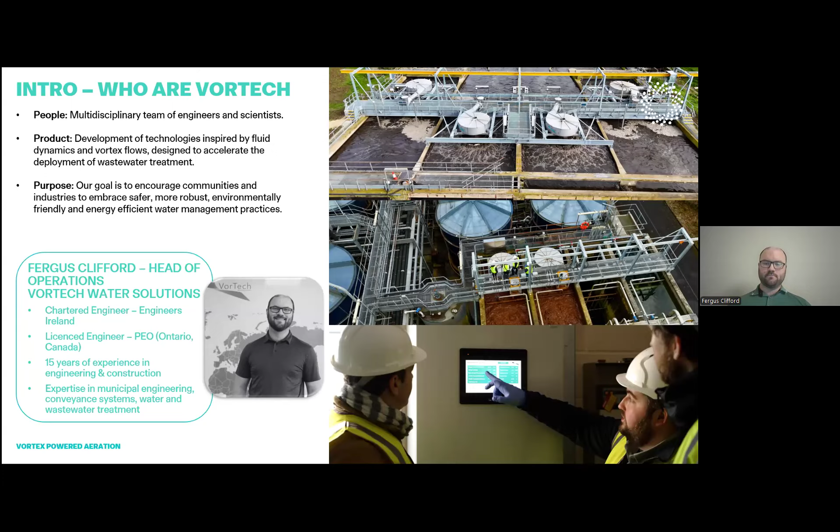So a little bit of background on myself. I'm not going to go into myself because Alan's already given a fairly comprehensive introduction, but just to give a little bit of background on Vortech Water Solutions, who we are and what we do. We're a Galway-based wastewater technology company. We've developed a proprietary wastewater aeration technology, which is inspired by fluid dynamics and the core principles of vortex flows, which we're deploying in treatment plants in Ireland, UK, Australia, and further afield.

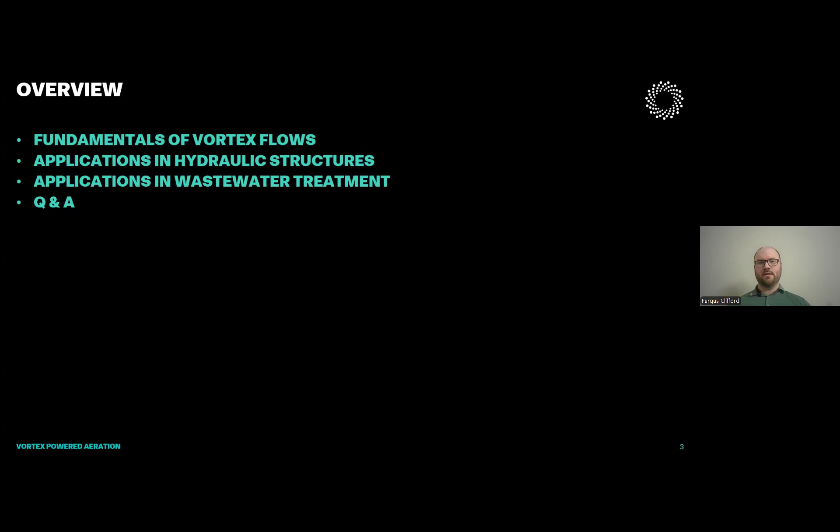Our team is made up of a multidisciplinary team of both engineers and scientists, and our team is cut from the same cloth in the sense that we're all fairly technically astute, but at the same time, we're not afraid to roll up our sleeves. And we've all been on site. I've been on site inspecting pumps at some of our wastewater installations. A few of my colleagues have not just inspected pumps, but actually maintained them, lifted them out. So we're not afraid to get hands-on. And I think that's one of the reasons why we have unique insights in the area of hydraulics and fluid dynamics.

As a purpose for the company, it's pretty clear. What we're trying to do is encourage communities, industries, and various stakeholders to embrace safer, better, environmentally friendlier, more energy efficient water management practices.

So really, there are three things that I want to try and convey from today's presentation. The first thing is to cover the fundamentals of vortex flows. So what is a vortex flow and how is it described in scientific or engineering terms? And then look at practical applications for this natural phenomenon in hydraulic structures and in the field of wastewater treatment.

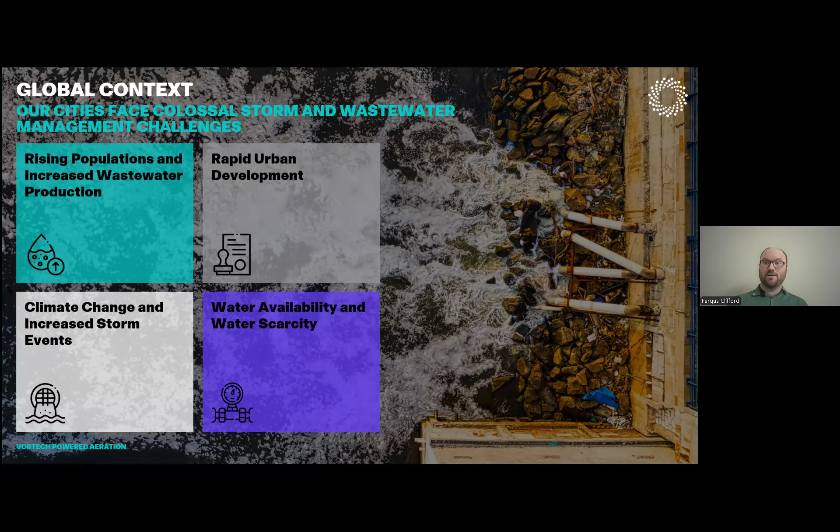So just to set the scene, the global context, particularly when it comes to urban infrastructure and conveyance systems, our cities are facing significant challenges today. So an obvious one is rising populations, but also water consumption per capita and generation of wastewater per capita is increasing in many different areas as well, putting strain on existing infrastructure.

Rapid urban development is putting strains on our infrastructure. So I had a couple of colleagues in Abu Dhabi last week at a conference, and an interesting fact I heard was the municipal area in Abu Dhabi has grown in size by 1,700% over the last 40 years. Incredible expansion, rapid expansion. But with that comes severe strains and challenges on the water infrastructure in that region.

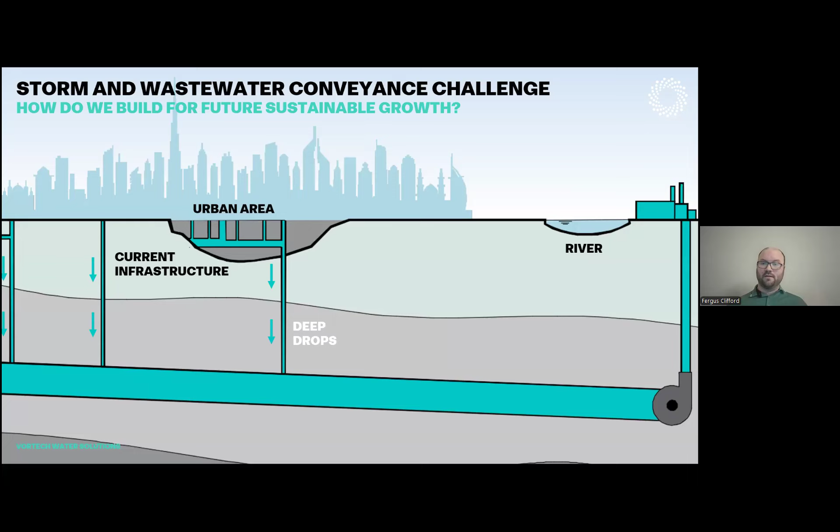Climate change is an obvious one. This 100-year storm 20 years ago is more frequent today. But coupled with that, and ironically enough, even in Ireland, water availability and scarcity is becoming a significant challenge globally. And while we're probably less prone to that in Ireland, even the Shannon pipeline to Dublin to shore up our capital's future water resources is an example of how even water availability actually does impact a country like ours.

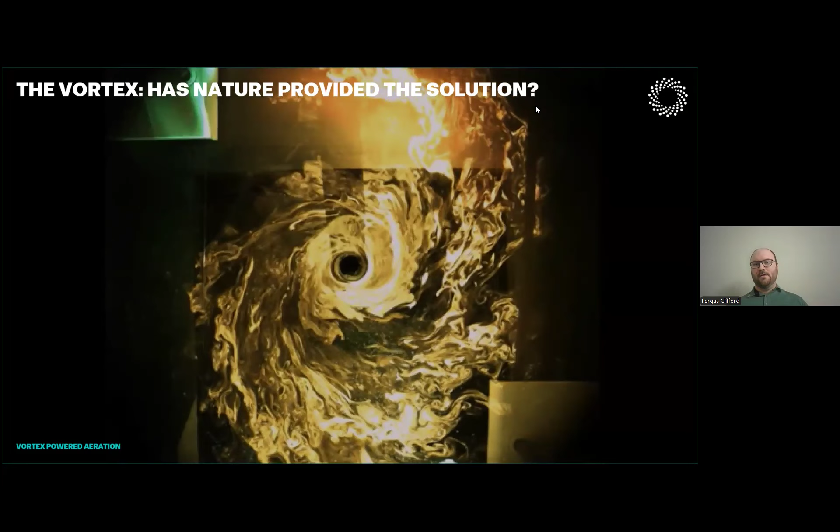So let's consider a typical urban area. So we've got our city and we've got our existing infrastructure. And when we consider the challenges on the previous slide, many cities around the world, the existing collection infrastructure, which is just a system of storm and sanitary sewage systems, or combined systems, is coming under stress. And if we want to avoid adverse impacts to the environment, like discharges to natural water bodies or even flooding impacts to our economy, we need some sort of a way to intercept the flows which are exceeding the hydraulic capacity of our infrastructure in these cities.

And the main way that that's been done to date is by going down. So we sink drop shafts into the ground and we construct deep tunnel conveyance systems, which are designed to intercept these flows, to store them, and also to eventually convey them to some kind of wastewater treatment infrastructure where it can be treated, potentially even reused, and discharged back to the natural environment. So in today's webinar, we're going to focus on two particular areas of this overall infrastructure thread. And that's the deep tunnel segments, so the drop shafts and the deep tunnel conveyance system, and also the wastewater treatment infrastructure.

So what we're looking at here is a typical vortex flow formation. And at first glance, it might seem quite chaotic. But in reality, it's actually a very predictable and controlled process. So if we dropped a little particle into this vortex flow, we could actually predict over time what velocity it would travel at, what its trajectory would be, what the pressure drop would be from A to Z. So with that in mind, what it means is there's a natural phenomenon which is predictable and potentially could be leveraged to actually solve some of the challenges that we've discussed on the previous slide. And one of the ways of doing this is the use of vortex drop structures, which I'll come on to in a minute.

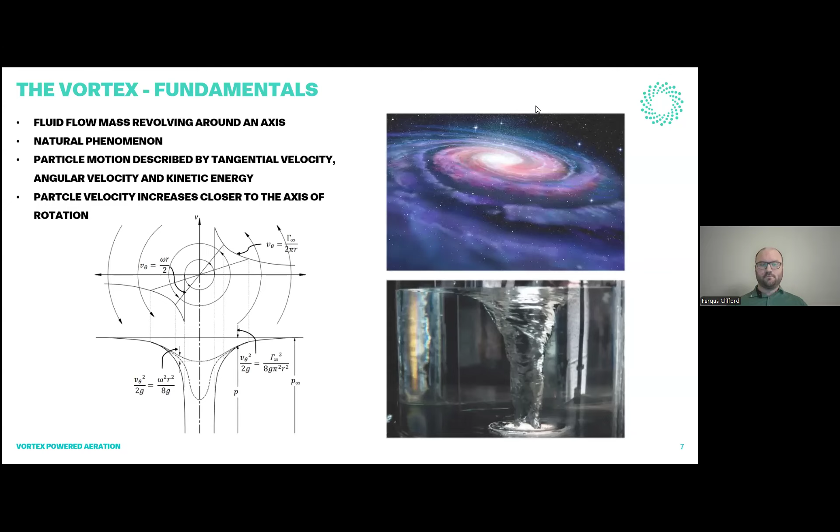But just to cover the fundamentals of vortex flows. So I mean, what is a vortex flow? In layperson's terms, it's simply just a fluid flow mass revolving around an axis. So we've all seen it in some shape or form, whether it's a hurricane or a cyclone. We've seen it in pictures of galaxies, space. Even when you stir a cup of tea, you generate a vortex. So we've all seen it in some shape or form or capacity. It's a naturally occurring phenomenon.

And really, from a scientific perspective and an engineering perspective, the three main characteristics of particle motion in a vortex flow are described by its tangential velocity, its angular velocity, and its kinetic energy. So if you look at the schematic below, if there's a few hydraulic engineers on the session this evening, you'll probably recognize some of the formulas. There's velocity head down on the bottom left and the bottom right. There's also a formula there for literally angular velocity. But the formula there on the top right is an interesting one. It describes the tangential velocity of a particle in a vortex flow. And that constant on top of the equation, gamma, is fixed.

So immediately we can see that there's a relationship between the velocity of a particle in a vortex flow and the radius from the central axis of the vortex flow. So when the radius gets smaller, the particle speeds up. And that's a key characteristic of vortex flows, which can be leveraged in big engineering projects globally and even in the wastewater sector as well.

So coming back to our city, we've got our existing infrastructure, we've got our infrastructure that's under pressure. We need to send the excess hydraulic load somewhere. So I guess the first part of the webinar is going to focus on the deep tunnel conveyance system. And in the second part of the talk, we'll do a deeper focus on the wastewater treatment side.

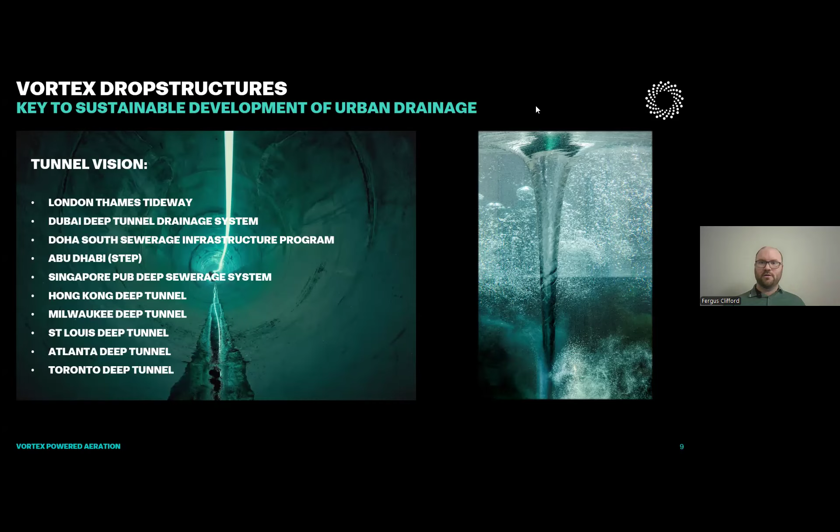The Hong Kong deep tunnel is another interesting one. I heard a statistic recently where I think it's upwards of 210 cubic meters per second in peak flows flowing through that system. Incredible flows. And the Toronto deep tunnel was actually a project that I worked with in Toronto when I worked in Canada for about 8 years. On the east side of Toronto, the Don River runs along the city.

And again, it's the same challenge that a lot of older cities, let's say, I mean, Toronto isn't an older city, but a lot of the sewage infrastructure there is quite old. Hydraulic capacity insufficient, and during wet weather events, particularly some of the combined sewer segments will literally overflow into the Don River, which makes its way into Lake Ontario. So there's significant environmental and pollution concerns associated with that. And that's why these projects are necessary.

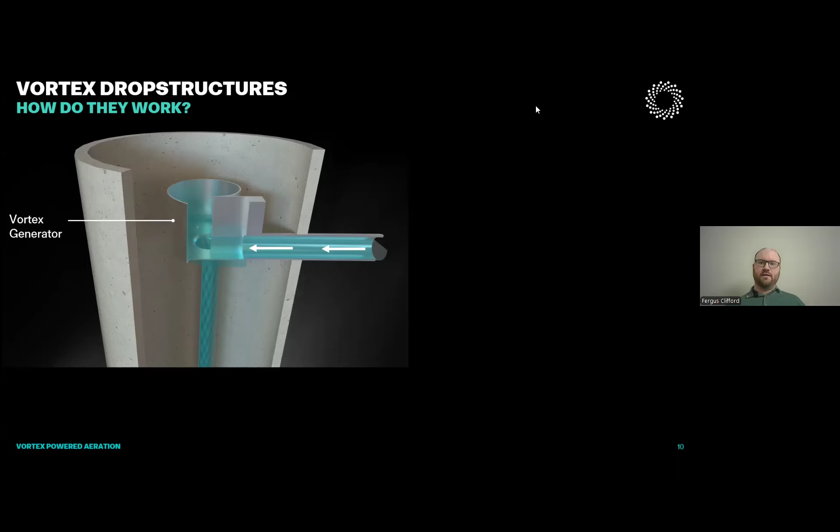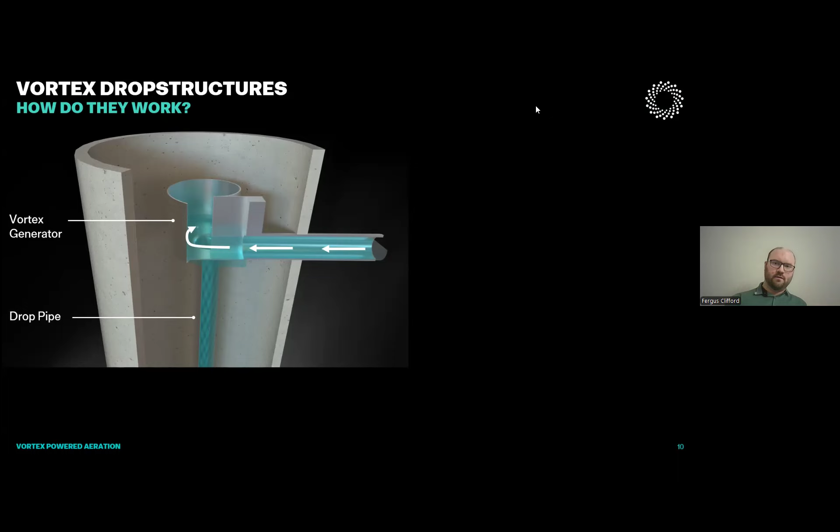One thing to bear in mind though, when you're dropping flows to such depths, so we're starting off at a high elevation and we're dropping flows 20, 30, 40, even 50 meters, the mass of that fluid column is substantial and the forces that it can generate are massive. So an interesting stat I came across recently was your typical vortex drop structure can dissipate up to the equivalent of 6 tons of TNT per hour in force, so incredible forces generated. And we need a way to drop those flows safely so that they're not damaging our infrastructure or causing erosion, let's say. So how do drop structures work?

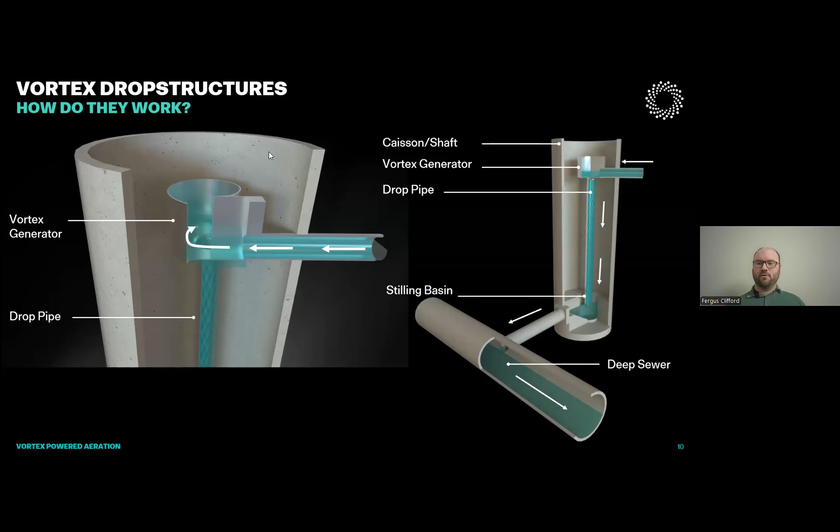Again, most of you will be familiar with this, but we've got a linear flow coming in from a conveyance system, which is a sewer. So if we track our little particle coming in, it's got a linear velocity, linear momentum. And this vortex generator, which is just a specific geometry designed to induce a vortex when an incoming flow meets it at a particular trajectory, converts the linear momentum into angular momentum. So now our particle, it's got linear velocity. Now it's flowing around the vortex generator with an angular velocity.

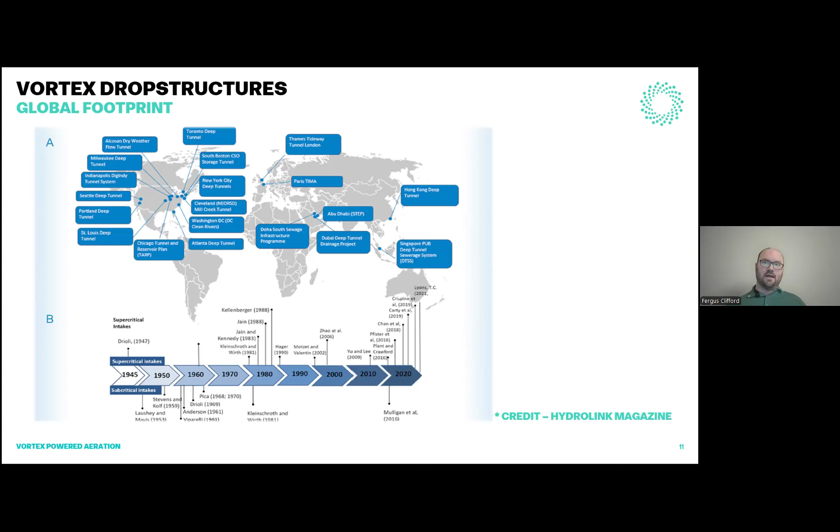But as it's moving in towards the middle, towards the vortex core, it's speeding up. So we talked about that in the previous slide. When the radius is decreasing, our velocity is increasing. And when it enters the drop pipe, because of its velocity, it's got a significant centripetal force, so it grips the walls. And over drops of 20 or 30 meters, you can dissipate a substantial amount of energy because of the centripetal effects and the friction effects. So that's how we're able to do this. And on the right-hand side, you can see kind of an overall schematic of your typical vortex drop shaft and how that connects to your deep sewer segment.

So just an interesting kind of map of deep sewer projects that have been rolled out across the globe. You can see a lot of cities in North America are now pursuing deep tunnel projects because of flooding issues that they're having and insufficient capacity with their existing infrastructure. Thames Tideway is a massive project. The Toronto Deep Tunnel I worked on briefly, but you can see that like large urban areas are now having to start constructing these vortex drop shafts and deep tunnel segments to deal with capacity issues.

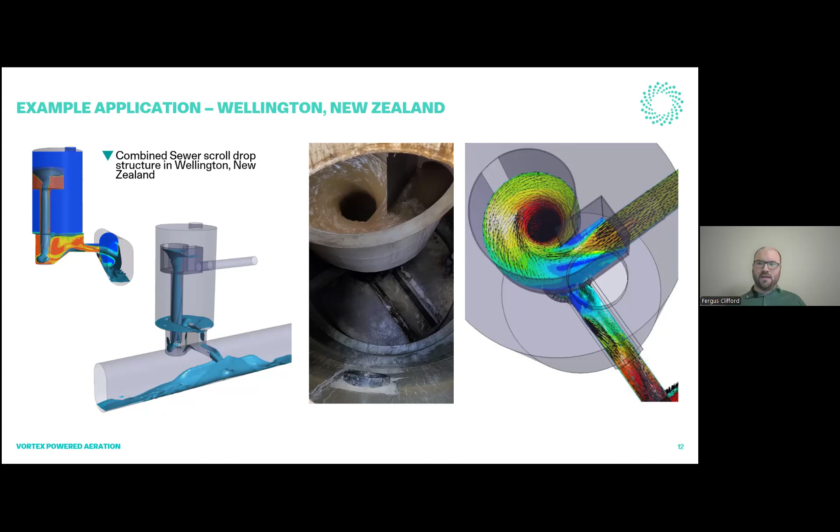So just as an example, and this example is intended to show the CFD angle. How can we leverage the numerical world, or the simulation world, to predict how flows are going to behave through different types of drop infrastructure, hydraulic infrastructure? This particular project is a vortex drop shaft that Vortech simulated for a client in Wellington in New Zealand.

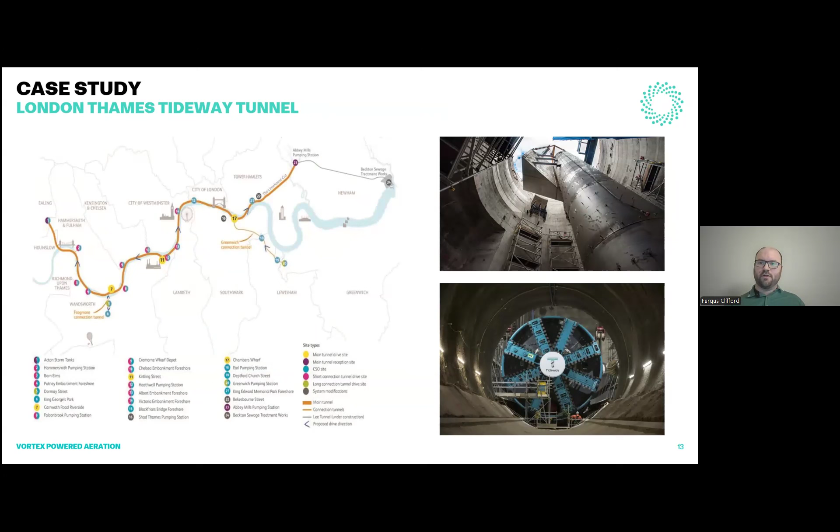And you can see in the simulation domain on the left-hand side, compared to the actual result on the right-hand side, that it can provide you, prior to construction, with a very good insight on how the fluid is going to behave under different flow conditions. So you might want to examine how it's going to behave under peak wet weather flow, or under dry weather flow conditions, to get the full variation.

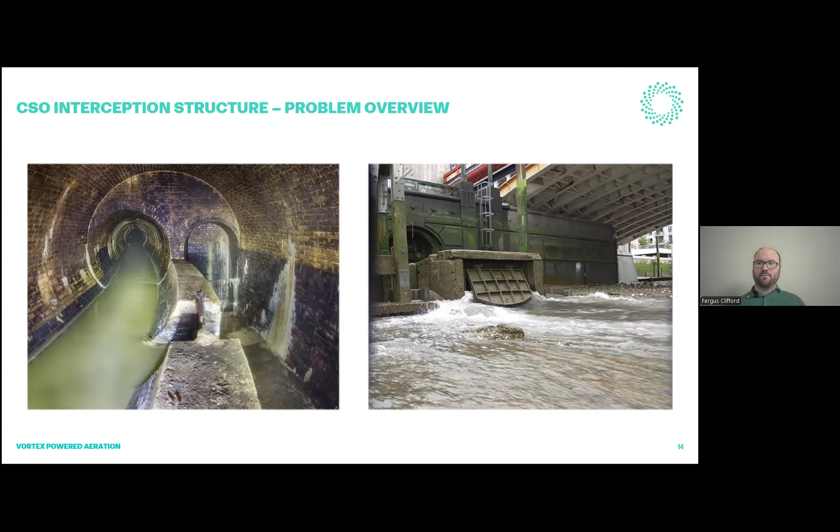So this is where CFD can be leveraged as a tool to understand the behavior of these structures prior to construction, and also identify particular risks. So maybe our vortex insert doesn't have enough depth and it overflows during certain peak flow conditions. So it allows us to spot risk in advance and make design tweaks prior to construction.

Another case study I want to run through quickly is the London Thames project, which I alluded to earlier. You can see that this is a fairly extensive deep tunnel project, which was constructed in London over the last decade or so. There are various different parts to this project. The element that we were involved in was a section around the Putney Bridge, again, prior to my time.

But to provide a little bit of context on the challenge here, on the left-hand side, you can see the existing type of sewage infrastructure in London. London's sewer system has been constructed from the 1800s onwards. So it's an incredible piece of engineering, but it was also built for the demands of that time. And the demands of our time are substantially more. And you can see the results of insufficient capacity in these systems on the right-hand side.

So with a combined sewer system in a wet weather event, storm flows combine with sewage, overflow events occur, and inevitably the combined sewage just makes its way into the River Thames. So there's an environmental impact and there's a water quality impact. So that's the purpose of the Thames Tideway project.

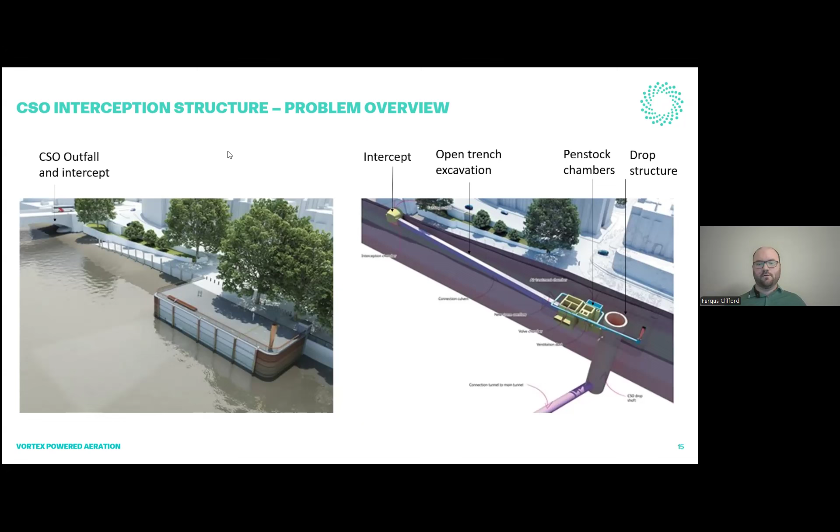The particular segment that Ward and Burke were involved in, and that we collaborated with Ward and Burke on, was around the Putney Bridge. It's a heritage monument in England. It's an important piece of architecture in London. And directly underneath the bridge, there was a combined sewer outfall, which essentially just served as a discharge point for sewer overflow from the existing sewer system.

So Thames Water wanted to capture the combined sewer overflow from this CSO and convey it to the new deep tunnel system, where it could be stored and treated in the future rather than being discharged into the Thames. And the original concept was to construct an interception enclosure around the CSO, and then open cut excavate a gravity line to a flow control configuration with penstocks and valves, and then drop it down in a drop structure to the deep tunnel system.

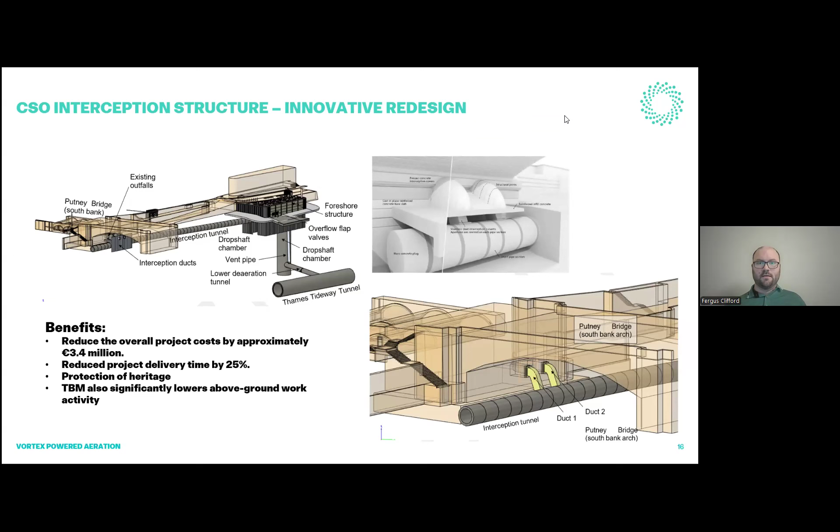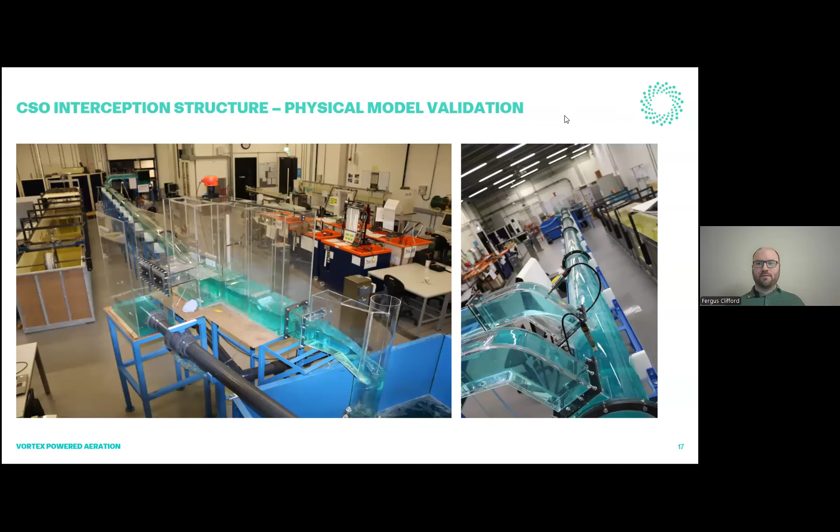But this concept presented significant challenges, particularly with the open cut element in such close proximity to the abutments of the bridge. It presented structural concerns and structural risks. So Ward and Burke came up with a very innovative concept, and I've worked with them in Canada as well on the trenchless front. Very good contractor, very good when it comes to microtunneling as well. But they came up with a very innovative trenchless approach for intercepting this CSO.

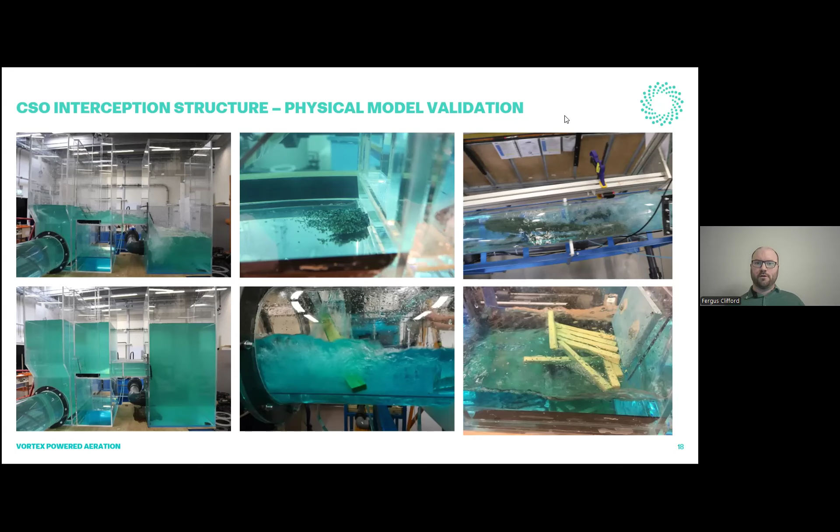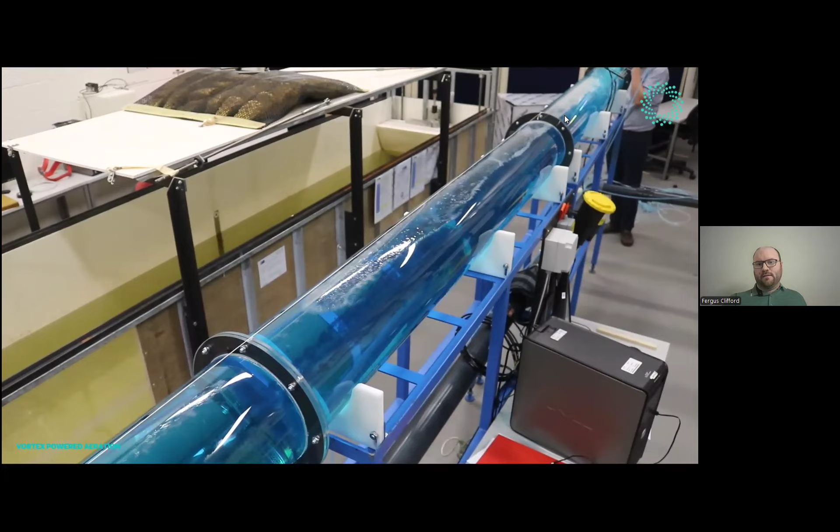However, this approach required validation with Thames Water. There was an existing design which had been validated, and Thames Water wanted assurances that this new concept would work. But what this concept would deliver is a substantial reduction in the overall cost, and a significant reduction in time on site, which means less disruption in the city, protection of a heritage monument, and, because the vast majority of what was being proposed was trenchless, it eliminated significant above ground disruption to do with open cut excavation. So really you would have only had localized excavation where the reception and launch shafts would have been.

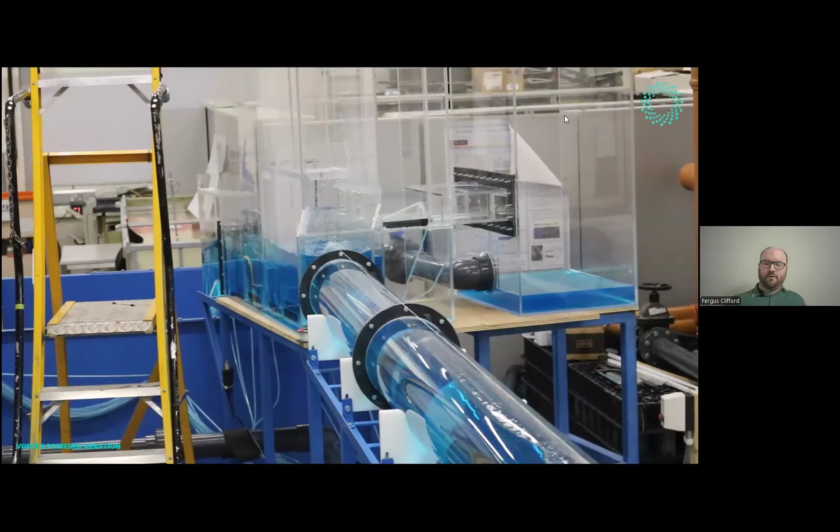So the role that Vortex played in this project was to help Ward and Burke with the numerical and physical validation of this new concept. And how we did that was we actually constructed a scale model of this sewer segment in NUIG in Galway. And that scale model is actually still in the hydraulics laboratory today.

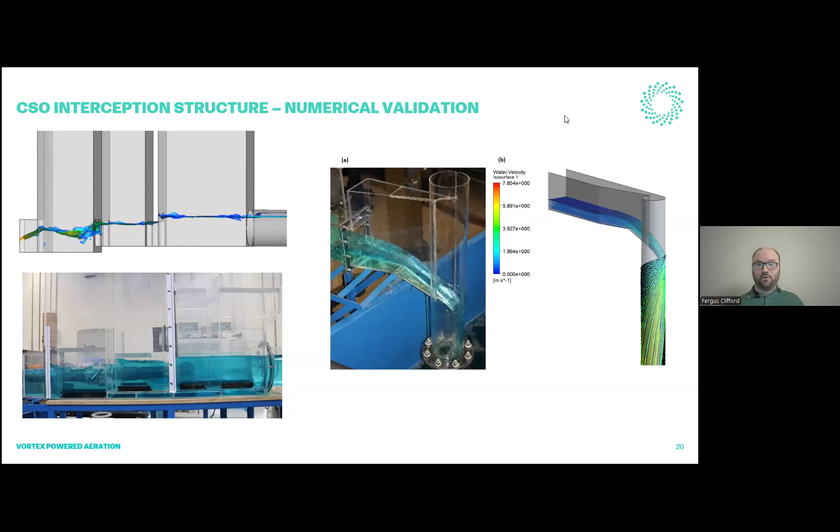And what we were able to do was simulate physically. We were actually able to physically test different flow configurations through the scale model. For example, we were able to look at the tidal influences on the Thames on conveyance. We were able to look at the impact of grit, gravel, debris getting into the system and how that might be evacuated. So there's lots of different things that we were able to demonstrate to Thames Water by constructing this physical model.

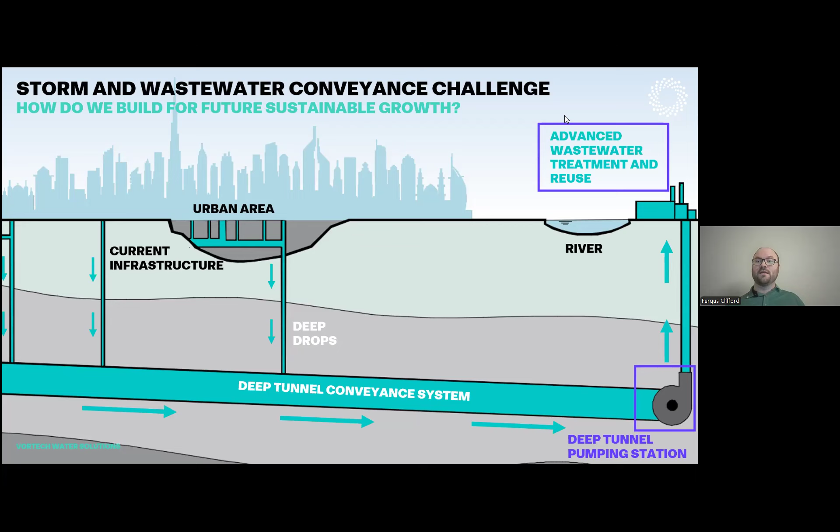So coming back to our city again, we've talked about how we can potentially deal with challenges for the existing collection infrastructure in our urban area. And now that we've captured those flows, they inevitably make their way to some kind of a pumping station from where they're conveyed to a wastewater treatment facility. And this presents another challenge. So again, going back to the context, specifically when we look at wastewater treatment, population increases, more water consumption. That means more volumes of wastewater are being generated in our urban areas, and that's a rule of thumb, broadly speaking, globally, including in Ireland.

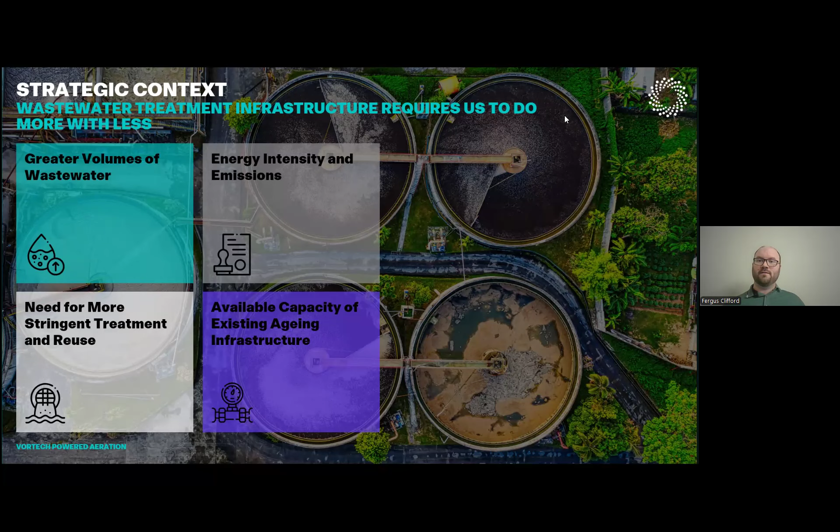One key element that's now come on the radar in recent times is the energy intensity of wastewater infrastructure. I read a statistic recently. I think approximately 3 to 4% of global energy consumption is associated with wastewater treatment. So it's very significant. In addition to that, you've got carbon emissions associated with the energy use, but you also have things like nitrous oxide emissions from wastewater treatment plants and methane emissions from wastewater treatment plants, which also have a significant carbon footprint. There's also more pressure being put on existing infrastructure from the regulatory side.

So we've got more stringent wastewater treatment requirements, and in many countries around the world, Australia is a good example of this, treatment plants now need to be able to actually treat wastewater to a point where it can be reused. Some cases even for drinking water, but in many cases at minimum for things like irrigation. All of this in the context of aging infrastructure. And again, just focusing on Ireland, much of our wastewater infrastructure is decades old, treatment infrastructure. With Uisce Éireann, in fairness, there's a lot of new water and wastewater treatment plants being constructed around the country where demands are required. But a lot of our treatment plants are very old. And because we have aging assets and aging infrastructure, it's kind of putting a demand on our existing treatment plants to do more with a lot less.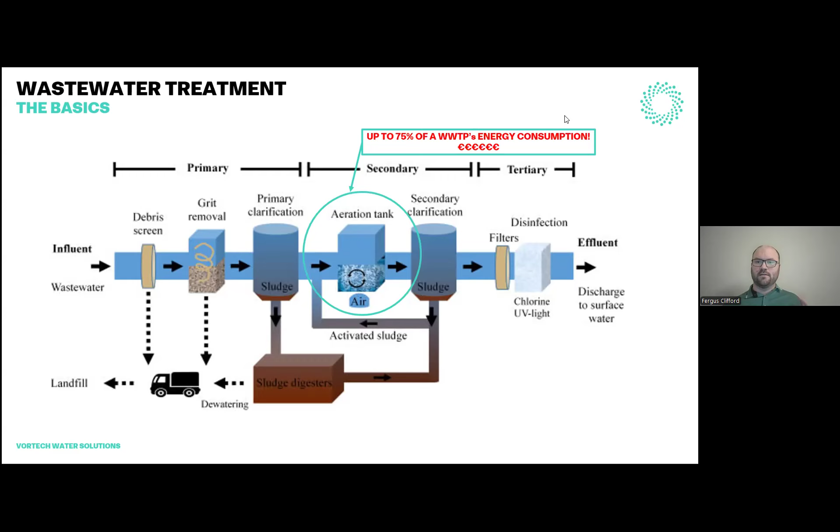So a little bit of a basics on your typical wastewater configuration. In the vast majority of wastewater treatment plants around the world, you'll have primary treatment and secondary treatment. And in some cases, you'll have tertiary treatment as well. And primary treatment, in a nutshell, I like to describe it as kind of crude treatment. So that's your removal of debris, removal of grit, and removal of settleable solids. Your secondary treatment is really the workhorse of a wastewater treatment plant. That's where all of your soluble contaminants make their way.

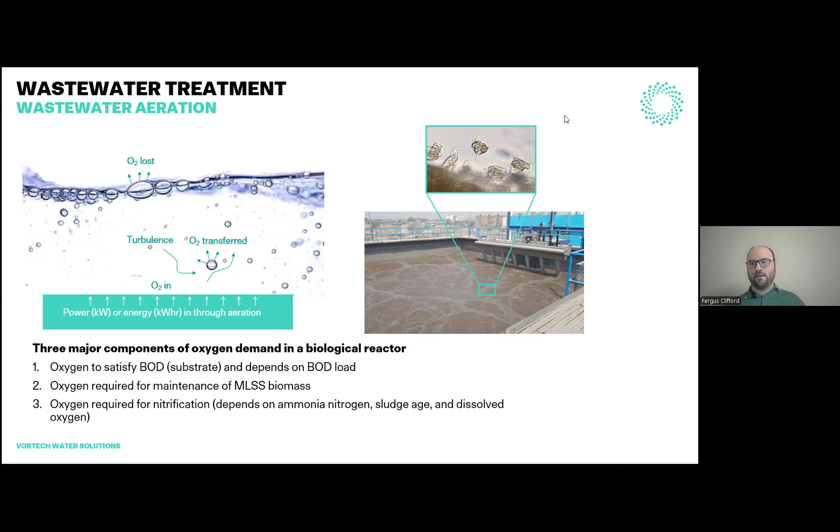And this is where the vast majority of energy consumption occurs, and it's specifically in the aeration tank. So aeration can consume upwards of three quarters of a wastewater treatment plant's energy bill. That can vary, but it's a substantial energy footprint relative to the overall treatment plant. And what that means is if you're going to try and make a significant impact on the energy consumption and carbon footprint of wastewater treatment infrastructure, this is the area that you're going to focus on first.

So just to do a little bit of background on wastewater aeration, what is it and why is it necessary? Well, wastewater aeration in simple terms is simply the introduction of dissolved air and dissolved oxygen into wastewater fluid. And that's done by many different mechanisms, and we'll talk about that in subsequent slides.

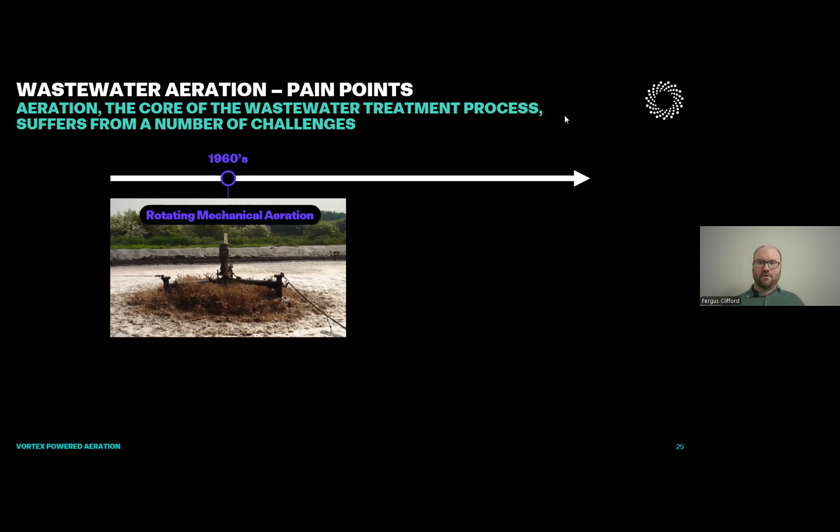But really, the reason it's necessary is because you can see here, the secondary aeration process is referred to normally as the activated sludge treatment process, which basically involves the mixing of wastewater with suspended bugs, I'll call them, suspended bacteria. And these bacteria require oxygen in order to remove the oxidizable contaminants, soluble contaminants within the wastewater. They need oxygen simply just to sustain themselves, just to survive. And they also need oxygen to remove nutrient contaminants from the wastewater, primarily in the form of nitrogen-based nutrients like ammonia, for example. So that's why aeration is necessary, and it's really the workhorse and the most crucial part of wastewater treatment beyond the physical treatment.

Little bit of a background on wastewater aeration technology. So the activated sludge process was invented probably over 100 years ago, towards the end of the 1800s or the beginning of the 1900s. And from then up until maybe the 60s, maybe beyond the 60s, the go-to way of aerating wastewater was simply by surface agitation. So rotating mechanical aeration devices. And what they do is they agitate the surface. That induces a kind of an air-water mixture, and you get aeration from that.

So beyond the 1960s, a lot of work started to be invested in looking into alternative, more efficient methods of aerating wastewater. And what's commonly referred to as the best-in-class technology today is FBDA, or fine bubble diffused aeration. And it's the most efficient way of aerating wastewater. However, both of these technologies pose significant challenges. And really, since the invention of wastewater aeration technology, many of these challenges have not yet been solved. And in particular, with FBDA, that's been the predominant form of aeration over the last number of decades. But a lot of the simple issues just haven't been addressed yet.

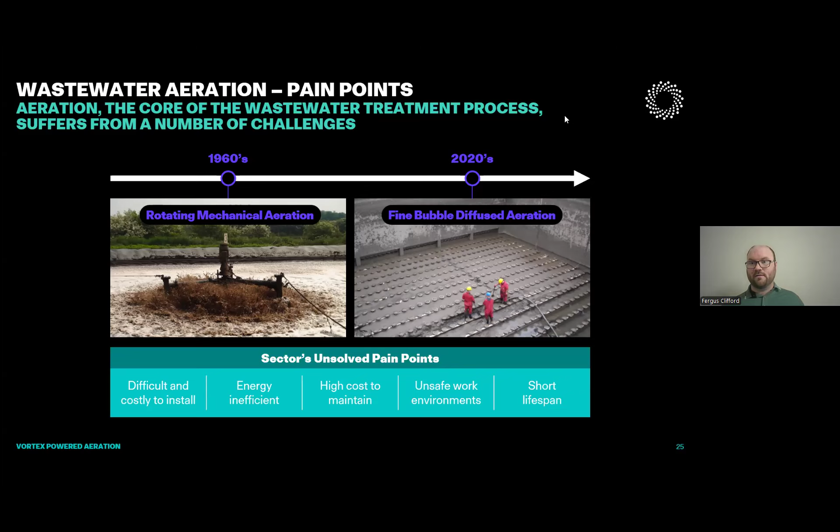So, for example, these technologies can be quite difficult and very costly to install. In many cases, they're energy inefficient. So, as an example, with fine bubble diffused aeration, you can get deterioration in performance over time because the nature of the wastewater constituents can actually coat the little diffusers that inject oxygen bubbles into the reactor. Maintenance costs is something that's been overlooked to a very high degree up until recent times. For example, with typical mechanical aeration, it's got a lot of moving parts, a lot of wear and tear. For example, motors, gearboxes, rotors, bearings, all of which need to be replaced because these things are oftentimes operating 24/7.

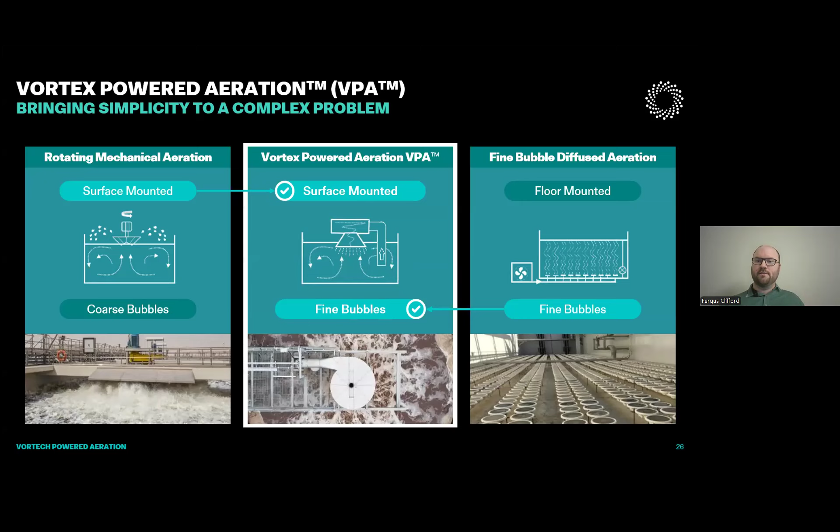Fine bubble diffused aeration, it's installed at the bottom of a tank. So if you want to maintain it, you need to drain the tank, which is very costly. And if your plant doesn't have redundancy, it leaves you with minimal options for how to actually do that. In some cases, we've heard instances of scuba divers being sent in to repair FBDA grids. So sometimes it can be disastrous. That leads into unsafe work environments. And in many cases, the longevity of these technologies is very short. So, we've seen instances of wastewater treatment plants where the FBDA grids don't last longer than 5 years and need to be replaced.

So really, what we're trying to do is understand how can we take the benefits of both of these existing legacy aeration technologies and blend the best parts of both while also eliminating the challenges associated with both. So we talked about how mechanical aeration, one of the benefits is it's surface mounted, so it's easy to access from a maintenance standpoint. It's relatively efficient, but in many cases not as efficient as other options. But what it does poorly is generate fine bubbles, which is necessary for oxygen transfer. Then we've got fine bubble diffused aeration, which is very good and efficient at generating fine bubbles, but which is installed at the bottom of a reactor. And that makes maintenance extremely challenging.

External blowers pumping air into tanks, and sometimes diffuser heads can pop off. So what we've done at Vortech is taken the best of both worlds. We brought aeration back to the top of the tank, but we're utilizing the fundamentals of vortex flows, which I talked about earlier, to generate fine bubbles and inject those back into a wastewater reactor efficiently.

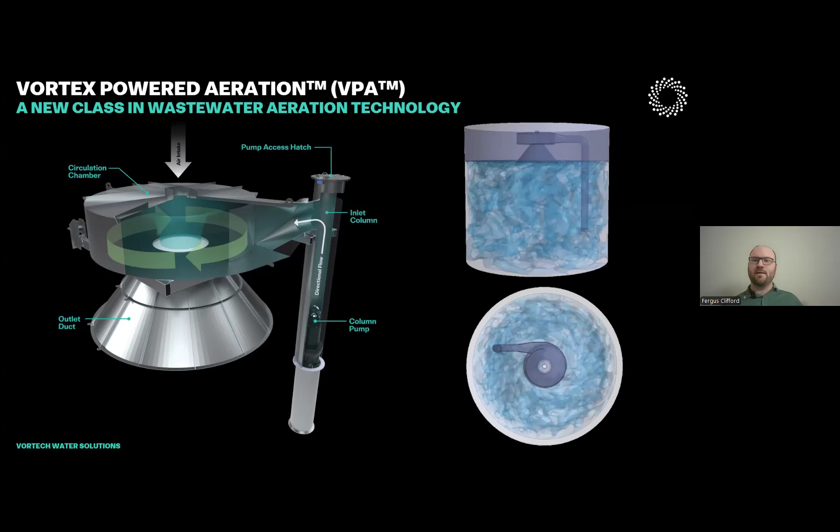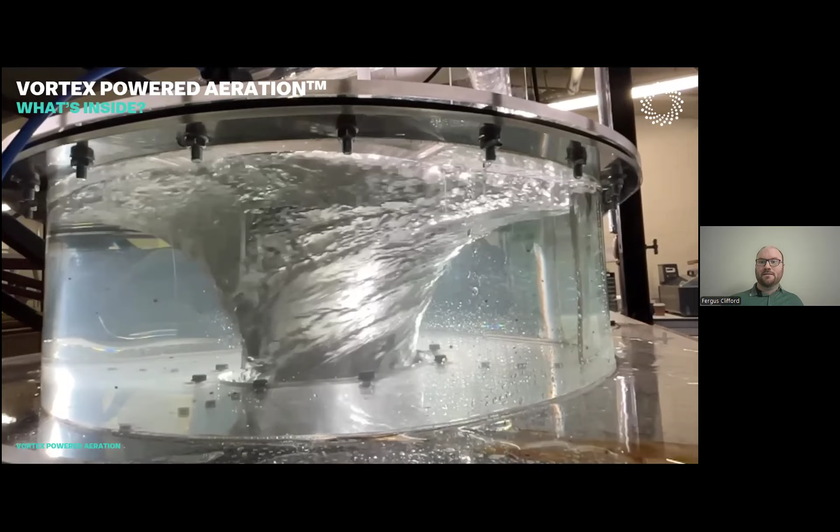So just to show you a little bit about our technology and how it works, there's really 3 to 4 parts to the technology, and there's only one moving part, which is a column pump or an axial flow pump. And how it works is there's an inlet column which is submerged within the reactor, and the pump draws activated sludge from the reactor, circulates it through the vortex device. An orifice on top of the device is open to the atmosphere. So if you can imagine, we're stirring the cup of tea, and in the middle there's a zone where air is constantly getting drawn in.

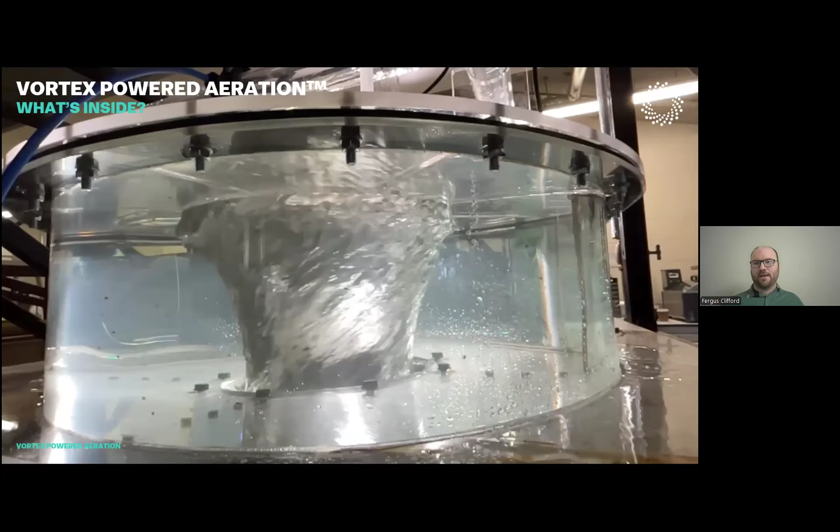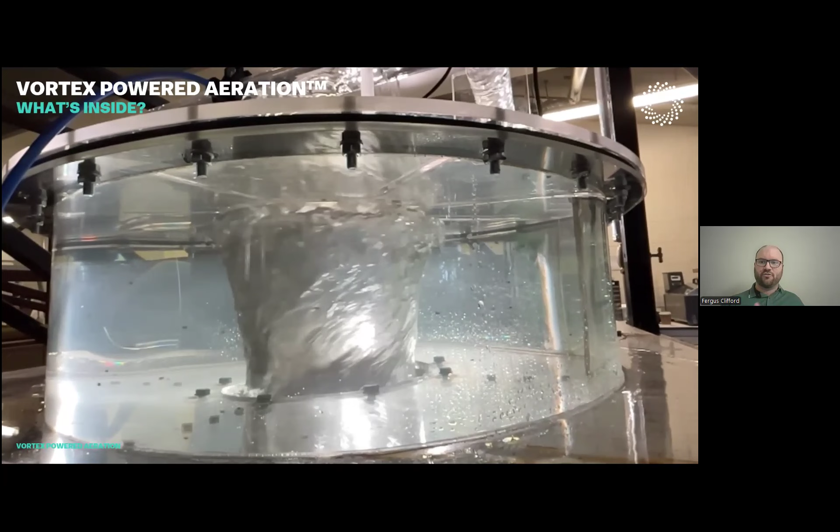So that's the same as what happens in principle. Air is drawn in. We've got well understood conditions, but high turbulence conditions existing within the vortex chamber. And at our air-water interface, when it's being discharged back into the reactor, that's where we get a significant amount of oxygen transfer. And we can inject that oxygen into the wastewater efficiently.

You can see on the right-hand side as well that not only does our device entrain oxygen, but it also mixes the reactor. So there's a secondary benefit because mixing is a key element of the activated sludge process. You need an equal concentration or density of bugs in every part of the reactor and an equal concentration of dissolved oxygen in every part of the reactor for the process to be effective.

So this video just shows you how the innards of the technology actually works. And the video's jumping a little bit here, but you can see the stable, but it appears chaotic, but quite stable vortex, which is generated within our device. And then the orifice at the bottom is where the air and liquid combined discharges back into the reactor, and you get air entrainment occurring. So it's a very simple device, and it's simply reliant on circulating the fluid within a specifically designed geometric structure to induce a stable vortex.

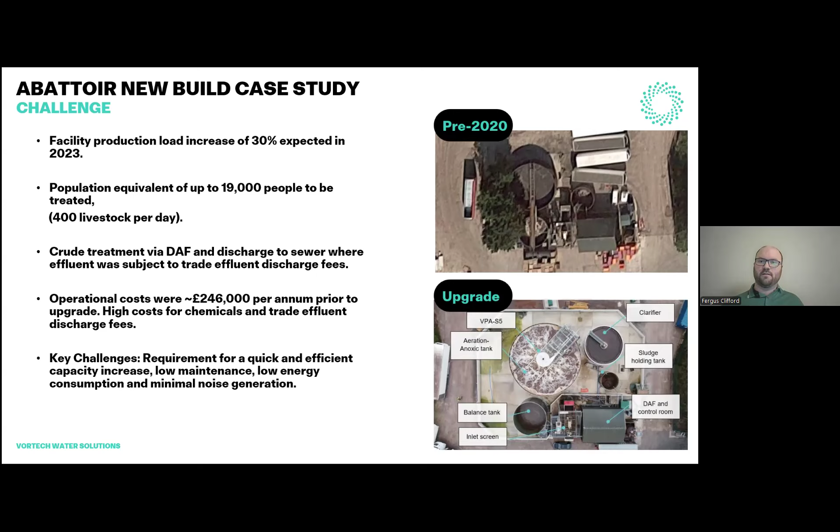So a couple of case studies we'll look at. The first one is an abattoir facility, which we installed one of our devices at in Somerset in the UK. And just to talk through some of the challenges that the owner of this facility faced. So the facility production load, they needed to increase production capacity within the facility by 30%. That was the expected increase in throughput in terms of cattle. And as a result, they needed a wastewater treatment plant which was designed to treat the population equivalent of about 19,000 people, so bigger than a small town. And that was to treat the wastewater generated from that livestock process.

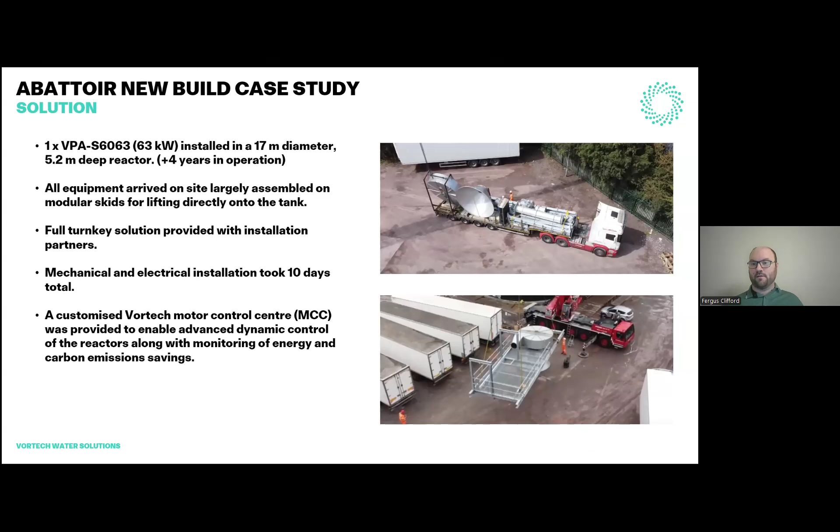Their existing treatment stream was quite crude, so really all it involved was solids removal using what's called a dissolved air flotation device. And then the effluent from that was just simply discharged to the municipal sewer. And for every cubic meter that they discharged, the owner of this facility was being charged significant trade effluent charges. So you can see it was upwards of about 246,000 per annum. In addition to that, significant chemical usage was required as part of the DAF. So what they wanted was something that could be fit quick and efficiently increase their capacity, was fit and forget, more or less low maintenance, low energy consumption, and also because there were existing dwellings nearby, they needed to make sure that there was minimal noise generation from whatever aeration device was used.

So we proposed a 63 kilowatt variation of our Vortex powered aeration technology. We were able to deliver the technology on site in a modular fashion. We have a design philosophy called design for manufacture and assembly, which means we essentially try and make everything as flat pack as possible and as easy and rapid to install on site. So you can see between the mechanical assembly and the electrical install, it took 10 days in total.

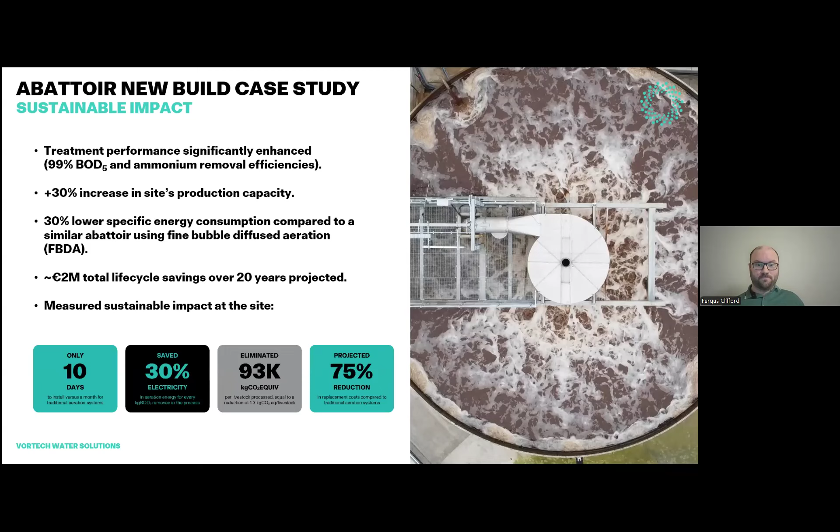And we also provided a control unit actually for the machine. So using basic instrumentation like dissolved oxygen instrumentation, we were able to provide a pre-programmed PLC which could effectively control our aeration device automatically without the need for intervention from the operator on site. And that resulted in significant energy and associated carbon emission savings.

So the results of the install speak for themselves. We were able to dramatically improve the treatment outcomes on site in terms of removal of biochemical oxygen demand and also ammonium. We were able to deliver on the increase in the site production capacity, all while lowering the specific energy consumption. So what I mean when I say specific energy consumption is the kilowatt hours expended per kilogram of BOD removed from the wastewater. So relative to another site that this owner was operating in the UK, we reduced their aeration energy consumption by 30% relative to that other site.

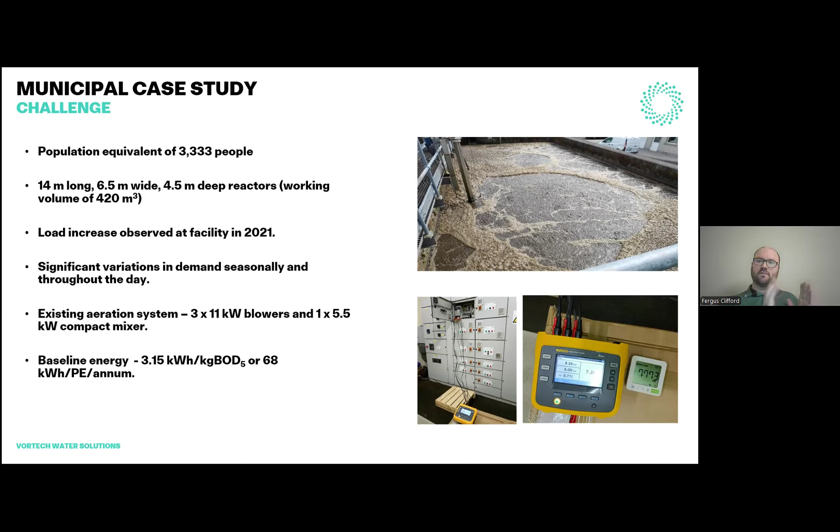And then really the benefit is gained in the long term. So it's the total life cycle savings over 20 years to the tune of 2 million euros. And we were also able to eliminate their chemical usage or dramatically reduce their chemical usage. We also eliminated the trade effluent charges. So not only were substantial costs eliminated, which they incurred previously, but also they got benefits in terms of reduced energy consumption and fit and forget, reduced maintenance requirements.

Another case study, which I'll run through quickly, is actually a municipal site here in Ireland. It's a small wastewater treatment plant in Mayo, population equivalent of 3,300. The existing wastewater treatment stream was divided into two aeration streams with fine bubble diffused grids. We observed a load increase at the facility in 2021, and we were noticing significant seasonal variations as well, which could be attributed to agricultural activities. It could be attributed to lots of different things.

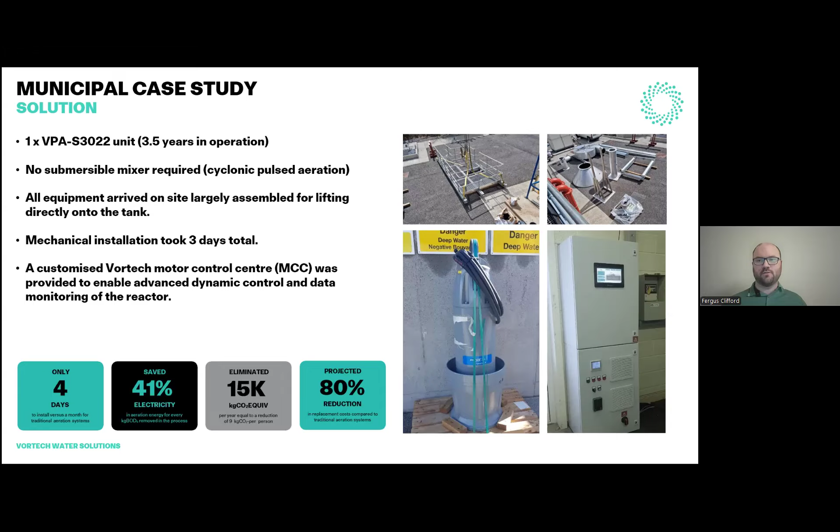What we were able to do at this facility prior to the Vortex powered aeration install was baseline the energy consumption of the existing aeration approach on site, which is blowers combined with fine bubble diffused aeration. So that served as a benchmark for comparison for the retrofit of our technology.

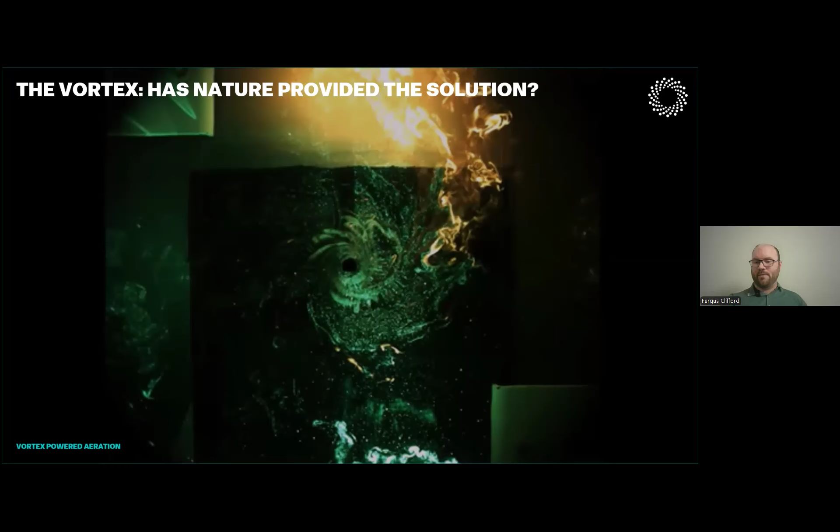And what we did at this site was put in a single 22 kilowatt Vortex powered aeration device. As I showed earlier on the computational fluid dynamics model, because we are able to simultaneously aerate and mix, the submersible mixer, which was necessary for mixing for the fine bubble diffused aeration install, was now redundant. So we were mixing and aerating at the same time. Again, simple benefits in terms of rapidness of installation and getting it operational. Mechanical installation was only 3 days.

And we also supplied, again, a control unit for the VPA unit, which included the actual PLC and instrumentation, which could automate the control of the aeration device on site and ensure that it was operating at its most efficient point, depending on the loads coming into the treatment facility.

So I suppose this is where I wrap up, but the question that we asked ourselves at the start of the webinar was, has nature provided us with a solution to some of the challenges we're dealing with in various aspects of engineering? And from our perspective, it has, in the form of vortex flows. We've been able to leverage this natural phenomenon to deal with challenges on the conveyance side and on the wastewater treatment side. And with that, I'll wrap up.